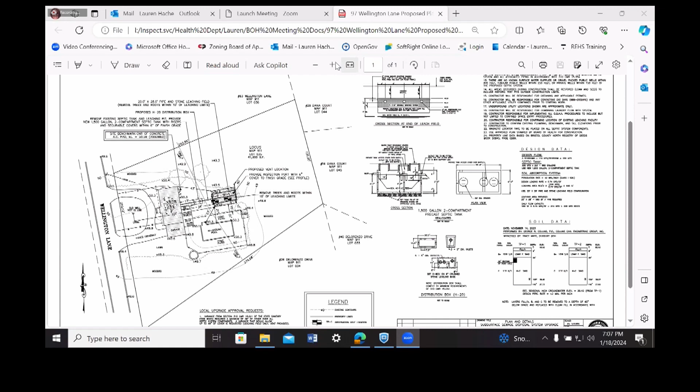Hey, I don't have any questions. I just have a quick question for Mr. Collins. As far as the cover over the leaching field, was there any other kind of alternatives that you considered to reduce that 4 feet?

There really isn't, just effectively the top of the system, the way the elevations work. You have a fixed elevation with the pipe coming out of the house, and then you have the fixed elevation over the system. The two things you could do, which I think neither would be a good idea, is you could excavate a hole around it, but you'd literally be creating a depression over the system, which wouldn't function properly from a surface water perspective. So we would not do that.

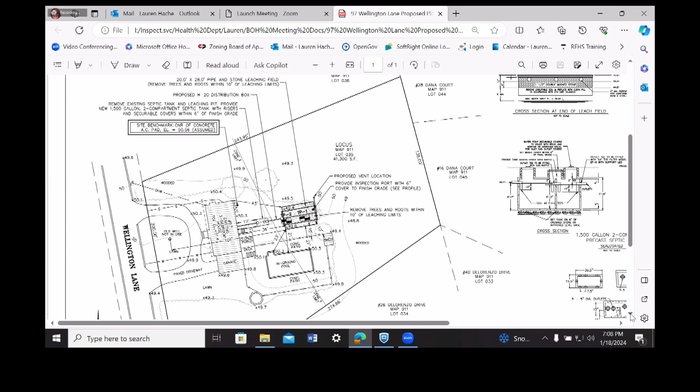And then the other thing that we could do is you could put in a pump system for this project. Pump systems add, if you don't have to touch the electrical service, usually $3,500 to $4,000. And in some cases, if you have to upgrade the electrical service, that can add another $1,500. So it could be a $4,000 to $6,000 cost increase. And then this does fall under the DEP local upgrade approval process.

So, there are some alternatives. I think they're poor alternatives. I think this is a good way to go. Have a gravity fed system vented as required, which is required by Title V under these circumstances. So I apologize, I'm just kind of rambling on, but hopefully I've answered your question.

Yeah, and I guess there's no plans for plantings or anything like that over this septic leaching field? No, it's actually in a lawn area. There's two small trees that have to come down to build this, but it's in a lawn area in the backyard, so there won't be any plantings or anything going over it. In fact, there's going to be a little bit of vegetation removal because of it. Okay. Thank you.

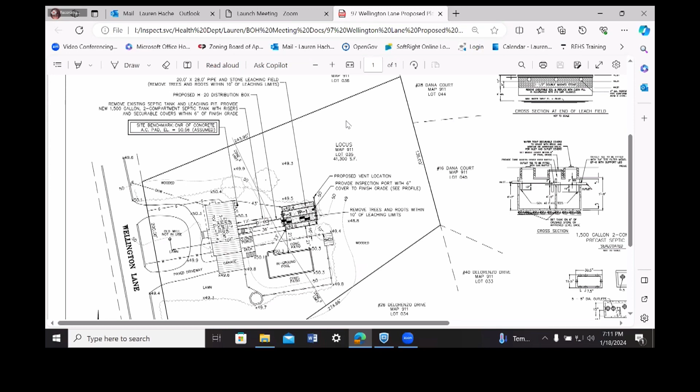Ready for a vote? Everybody okay? Bruce, any more questions? Okay. So I make a motion to grant a Title V local upgrade approval to 310 CMR 15.221B to allow the leaching field to be 48 inches below grade versus the maximum of 36 inches. One correction, the maximum is 36 inches, right? Yes, 48 below grade versus the maximum of 36 inches. Okay, second. You're checking on me. That's good. All those in favor? Aye.

Great. Motion carries. Second, we'll move to grant a variance to Duxbury Supplementary Rules and Regulations 1.111B to allow a 5.6-foot groundwater separation versus the 6 feet in soils with a percolation rate of 2 minutes or less per inch. Second. All those in favor? Aye. Motion carries. Thank you very much for your time. Oh, we're not done yet. Just comments and findings, and then we'll be done. I apologize.

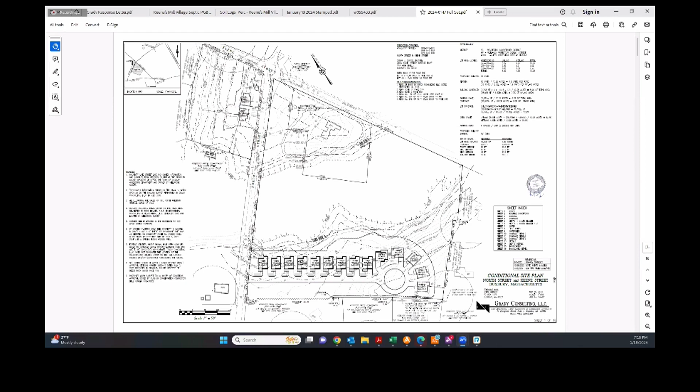For this project, we're designing 2 septic systems. So we've broken the area up into 2 areas. So up here is North Hamlet, and there's 2 single-family dwellings, which will each have their separate septic tank, and they'll go into a field up in this area. And then the South Hamlet, it's another 14 units, and those go through a series of sewage manholes to collect all of the wastewater. It goes through a series of tanks into, again, a Presby field.

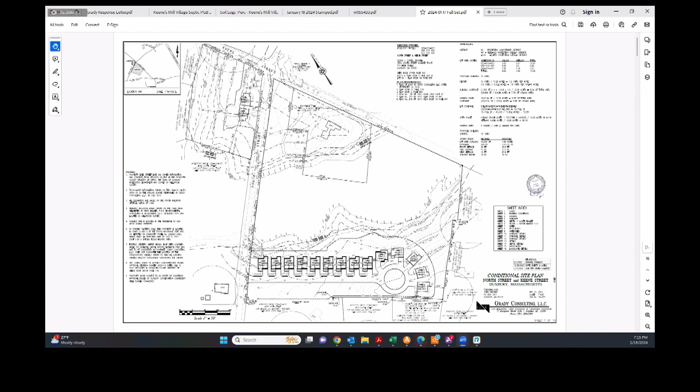Both systems are fully compliant with the state regulation. The reason that we are here tonight is we are seeking a variance for the local regulation, section 1.15, construction and fill. So I'm going to go over to the North Hamlet.

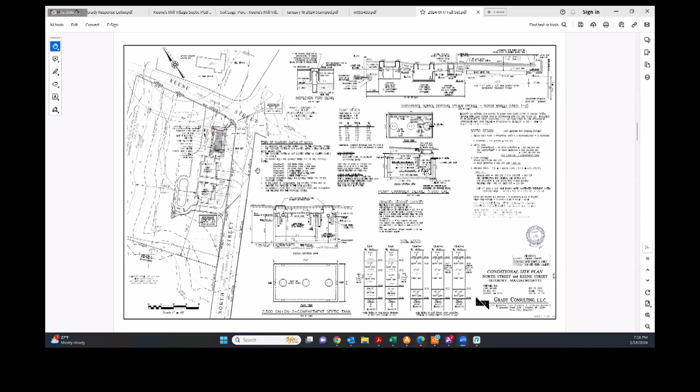So with this system, we're able to fit on here a conventional system with the reserve area, but we feel it's a better alternative to design a Presby system. Presby systems essentially can take up a smaller footprint, and they're really good for these larger flow type of systems. This system here is pretty standard. It's what you'd really see with a normal single family. This system here is a little bit larger. Zoom in on some of these houses.

So for example, this unit 8 here, each house will have an individual line that will feed out into this main sewer line. The sewer line flows by gravity from the right of the screen down to the left of the screen. It then goes through a couple of tanks. So we have a 10,000 gallon tank, which serves as the first compartment, and then into a 5,000 gallon tank, which serves as the second compartment.

And then it goes through 2 pump chambers. The reason for having 2 pump chambers is essentially to provide chamber storage in the event of a power outage, which is required by Title V. The effluent is then pumped up into this area, into a splitter box, which then splits it into these 2 fields where it's dispersed.

So as part of the section 1.15 requirements, we did submit stormwater management design and calculations. Again, that was part of the 40B process. And this design was subject to the peer review. So we'd be happy to answer any questions.

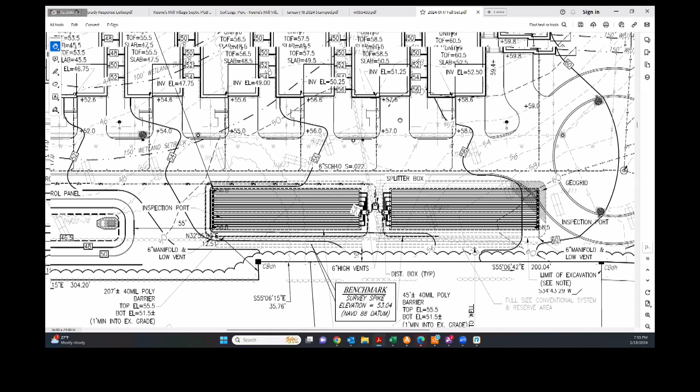I have a quick question. On the back side of these units, is all the runoff supposedly going into that basin? Is that the intent for the grading? Let me just zoom this out here if I can. So there's a couple of basins for this lower area here.

These basins here essentially collect runoff through a series of catch basins in the roadway, which then go down into these basins. From the rear of the house, from about 10 feet back of the front of the houses, you can see it does slope backwards. So the split line is probably about the front of the houses, and it goes backwards into this basin back here.

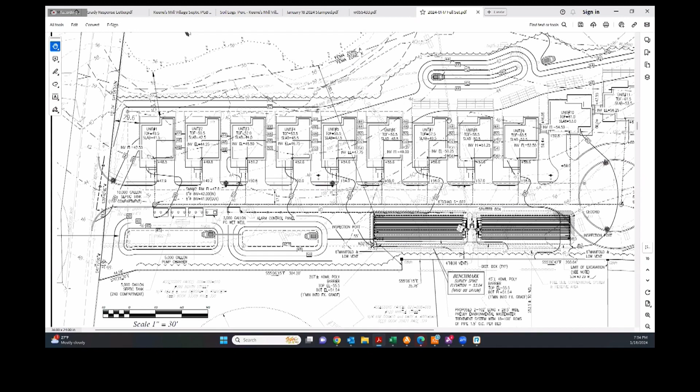Yeah, there's also a roof... Oh, sorry to cut you off. There's also a roof drain collection system for each unit. So for these units over here, we're able to design individual subsurface storage for the roof drains, and for these units, looks like 6 to 1, those go into the larger system.

Yeah, just looking at the drainage on the opposite of the roadside, I would just suggest adding grade to drain in front of units 1 to 4, and then in front of 10 and 11, arrows basically pointing into that basin, if that's the intent, as opposed to into the wetlands. I mean, it is kind of shoehorning everything into this lot.

But if the idea is to keep that runoff draining away from the wetlands and collecting in one certain location, it's tough to say that's going to happen the way it's drawn now, with the contours, without having some kind of pitch going towards that basin.

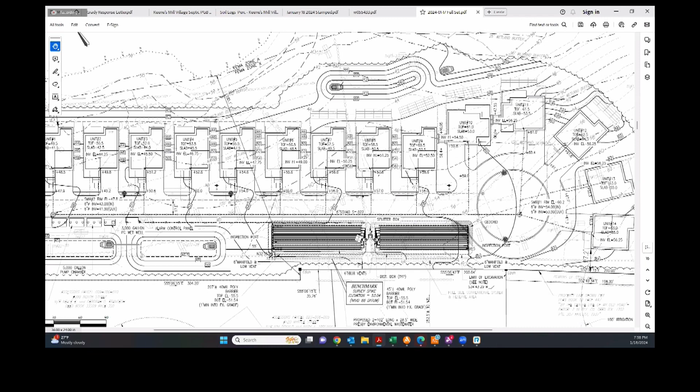Any further questions? So I think we need to approve the plan with the conditions that Mr. Brennan had put in his letter, and additionally specifying that this just be 3-bedroom dwellings. Anything else that we want to add to that? Bruce, anything else that you'd like to add to that?

Well, what was your 3-bedroom comment again? So that we would specify that this is for a 3-bedroom dwelling, right? Because they have the bonus room. So Tracy suggested that we specify that this is, if we approve this, a 3-bedroom dwelling. Yeah, but I'd like to see us say that bonus room should be open. Okay, we can do that too. Mike, is there anything else that you'd like to add?

No, I think just like you were saying, adding wording in there to define the opening to that bonus room, whether it's 6 feet wide and, you know, to remain open. That should be okay. Yeah, and that would only, John Baldwin, that would only be if it was insulated and heated and so forth. I mean, it's obvious. Otherwise, it's just going to be closed off completely. And it could be a cold attic space, but if that's the case, then it's going to be closed off.